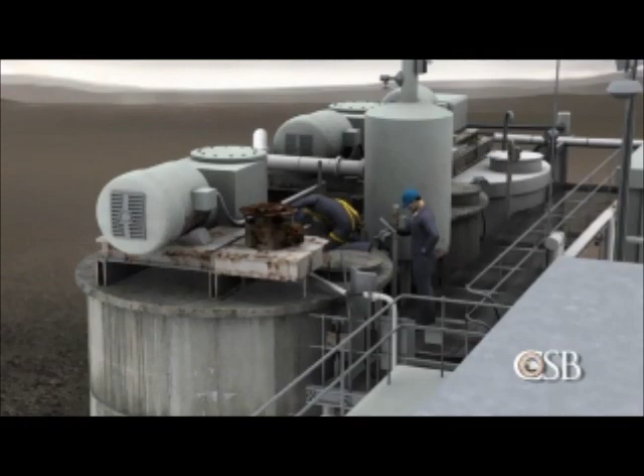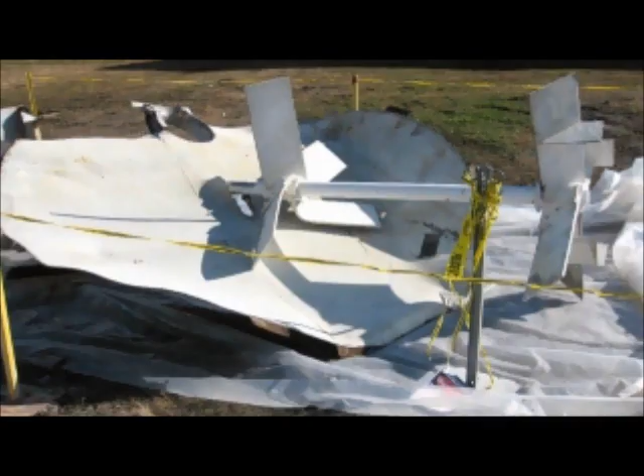On November 9, 2010, a powerful explosion shook the DuPont chemical manufacturing plant in Tonawanda, New York, a suburb of Buffalo. A contract welder was performing maintenance work on a tank that, unknown to him, contained flammable gas. The explosion blew the top off the tank, throwing the welder to the ground and killing him instantly. A second contract worker was burned.

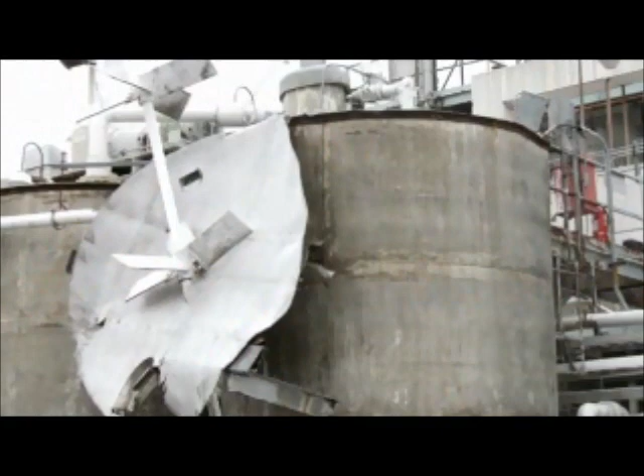The tragic explosion at the DuPont facility exposed weaknesses in how process hazards were analyzed and controlled. The result was the death of a welder in a preventable hot work accident. Hot work accidents occur when workers are welding, cutting, or grinding near flammable vapor, and were the focus of a 2010 CSB safety bulletin. Deficiencies in the safety management of hot work were among the causes of the tragedy at DuPont.

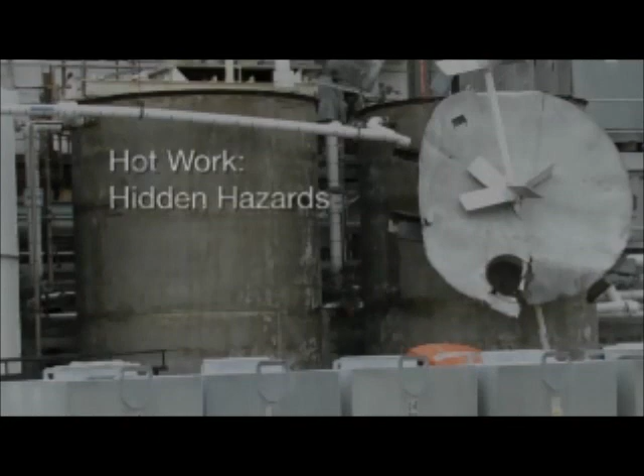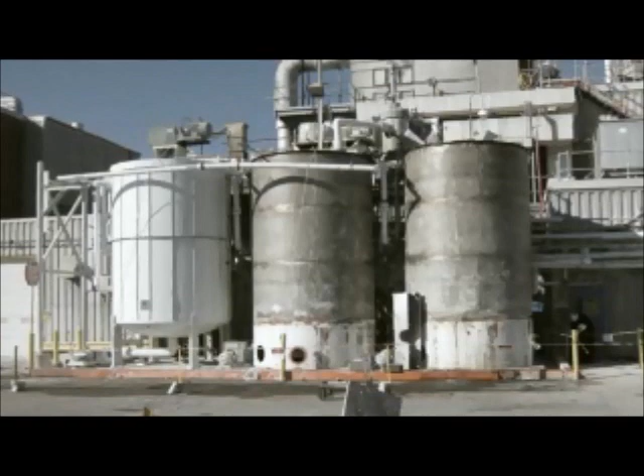DuPont's Tonawanda facility manufactures a polymer known as Tedlar, used in solar panels, and Corian for use in countertops. The process of producing Tedlar began with a chemical reaction to convert flammable vinyl fluoride gas into a slurry of polyvinyl fluoride polymer, or PVF, in water. The PVF slurry then passed through separators.

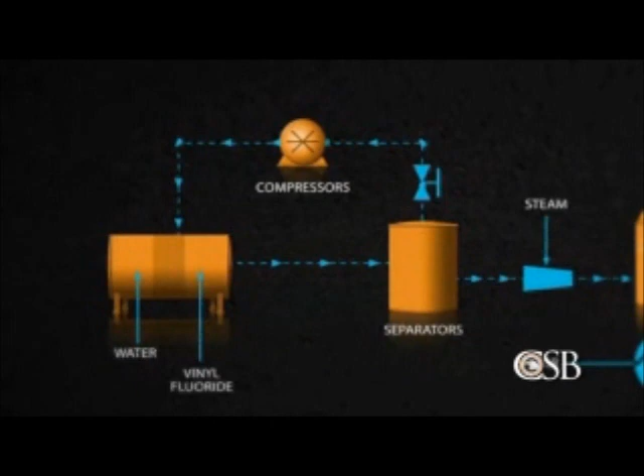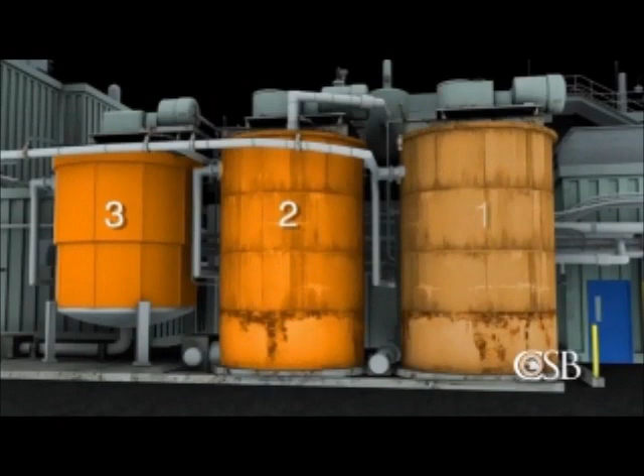Compressors recycled unreacted vinyl fluoride gas into the process, while a small flash tank released residual vinyl fluoride into the atmosphere. Finally, the slurry was transferred to one of 3 insulated holding tanks, usually tank number 3. Tanks 1 and 2 were reserved for slurry overflow. Tank 1 normally remained empty.

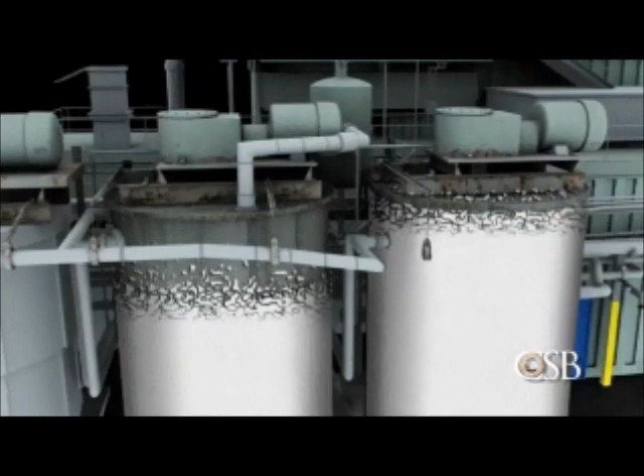On October 22, 2010, the Tedlar process underwent a planned shutdown, during which workers removed the asbestos insulation on tanks 1 and 2. Removing the insulation revealed that the agitator supports for the tanks were heavily corroded. DuPont directed contractors to repair the supports, which would involve welding and grinding on tanks 1 and 2.

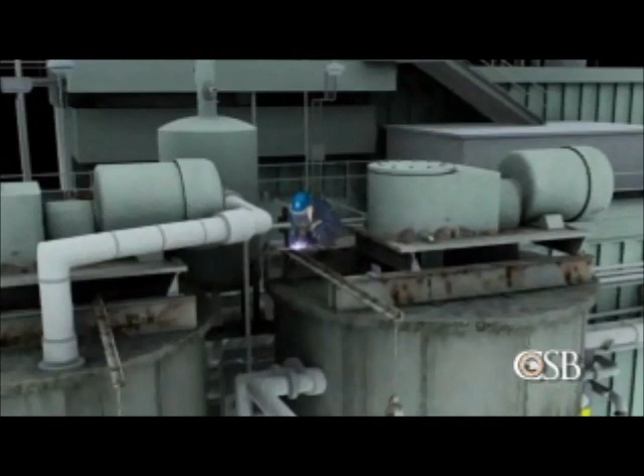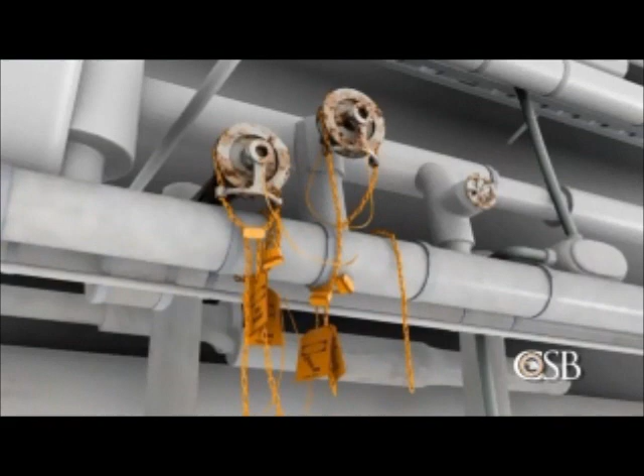The hot work on tank 2 occurred during the shutdown without incident, but the repairs on tank 1 were delayed while parts were ordered. DuPont personnel determined that it would be safe to perform hot work on tank 1 after the restart. On November 6th, DuPont operators locked all 5 valves leading to and from tank 1 in the closed position in order to stop potential slurry flow. The tank's agitator motor was also locked out.

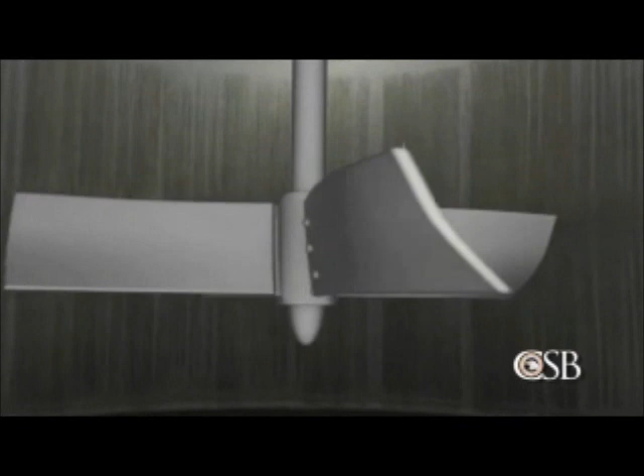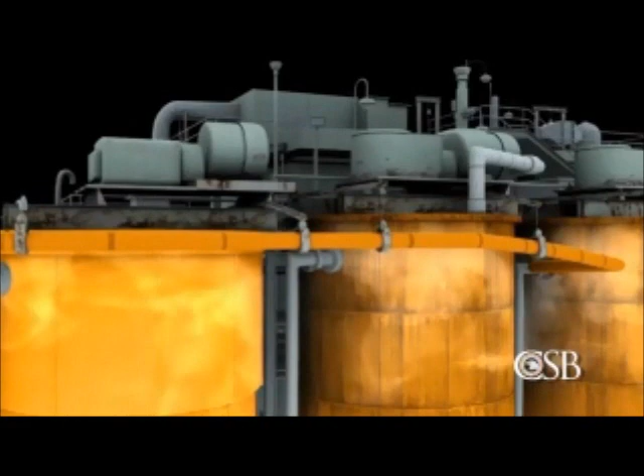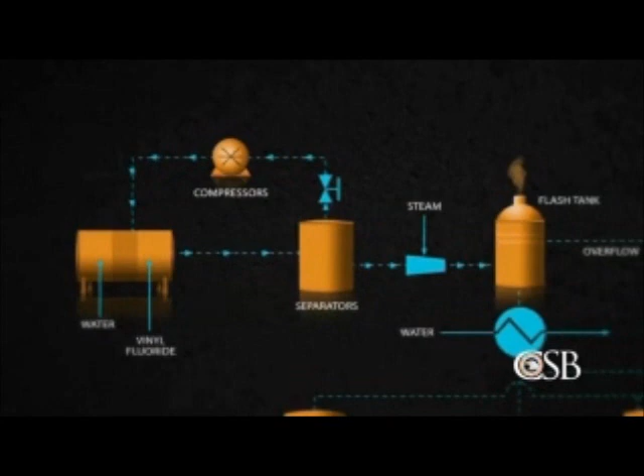However, DuPont personnel did not block the flow of gas inside the overhead piping, or overflow line, that connected the vapor space of all 3 tanks. They mistakenly believed that flammable vinyl fluoride gas could not reach any of the slurry tanks. But the CSB investigation found that even in normal operations, vinyl fluoride was not completely removed from the slurry and was always present in the slurry tanks in varying amounts. When the process restarted on November 7th, the flammable gas was able to travel from tanks 2 and 3 through the open overflow line into tank 1.

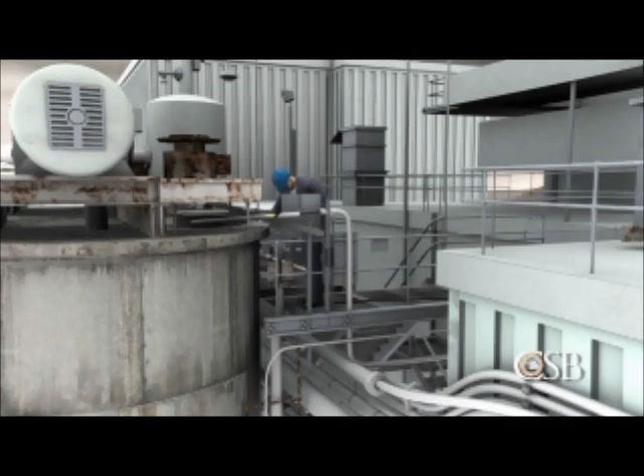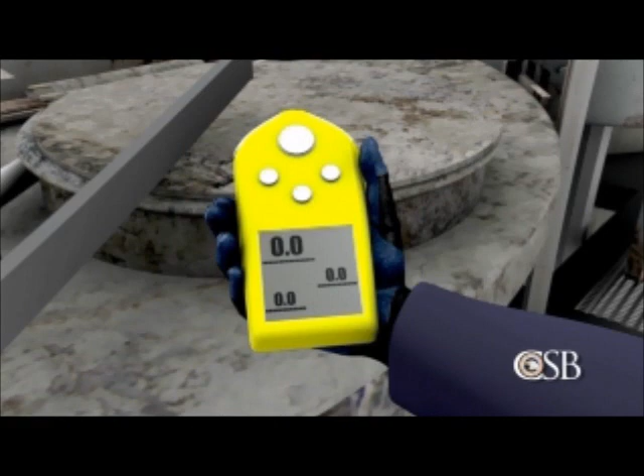On the morning of November 9th, a DuPont technician tested the atmosphere above tank 1, where welding would later take place. There were also 2 continuous air monitors in the vicinity. No flammable gas was detected, and the hot work was cleared to begin. But no testing was done to measure or monitor the atmosphere inside the tanks, where, unknown to the contractors, the flammable gas was at dangerous levels.

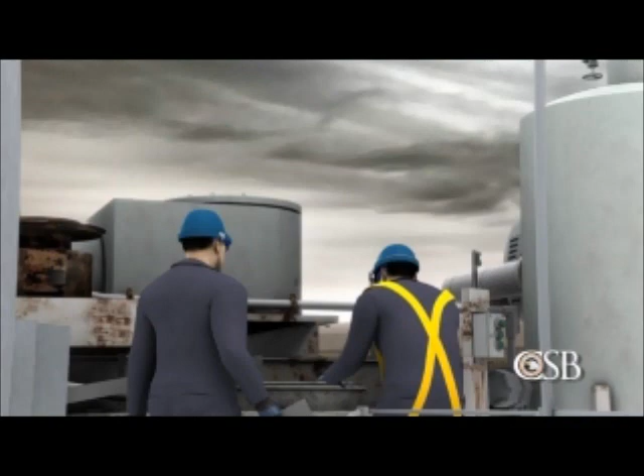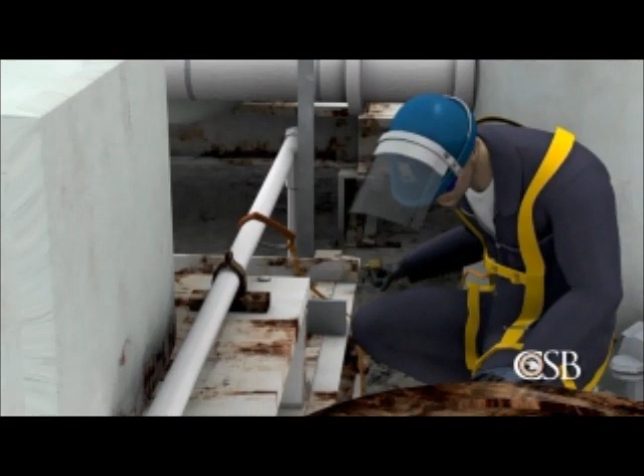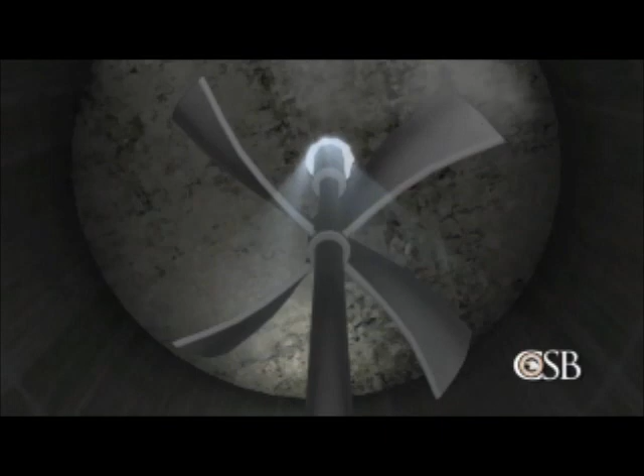Around 9 a.m., 2 contract workers began welding and grinding on tank 1. The welder connected his safety harness to the tank's agitator support and worked on top of the tank as the foreman looked on from the nearby catwalk. At approximately 11 a.m., the welder was repairing corroded portions of the agitator support beams directly above the flammable gas. A hole around the agitator shaft may have provided a pathway for ignition. Welding sparks could fall into the tank, even as flammable gas might drift upward toward the sparks. The ignition of the vinyl fluoride caused a powerful explosion.

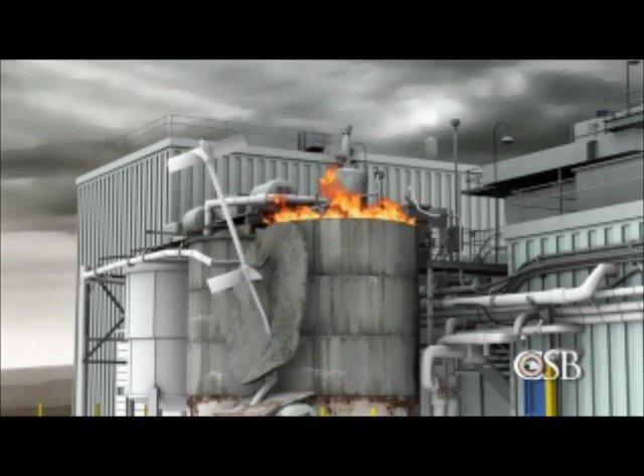The force of the blast blew the top of the tank almost completely off. A flash fire erupted that consumed the flammable gas and quickly burned out. The welder was thrown to the ground, killed instantly from blunt force trauma. The foreman's face and arms were burned.

Mark Wingard was a member of the CSB team that investigated the accident at DuPont. Had DuPont technicians tested Tank 1 for a flammable atmosphere, they would have known that any hot work presented a serious explosion hazard. But plant engineers did not realize that significant amounts of flammable gas could be present in the slurry tanks, and the testing was never done.

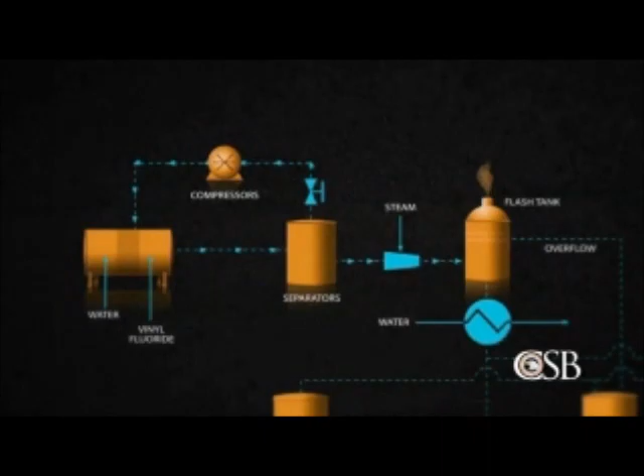DuPont regarded most of the Tedlar production process as covered under the OSHA standard for Process Safety Management, or PSM, and therefore subject to stricter operating and maintenance requirements. But DuPont personnel did not include the slurry tanks in the facility's PSM program. In a 2009 process hazard analysis, DuPont erroneously concluded that flammable vinyl fluoride gas could never reach the tanks in dangerous quantities.

We found that the contractors did obtain hot work permits for welding on Tank 1, but those permits were authorized by DuPont employees who were unfamiliar with the specific hazards of the process, and the permits did not require testing the atmosphere inside the tanks. Two additional factors may have contributed to the tragedy.

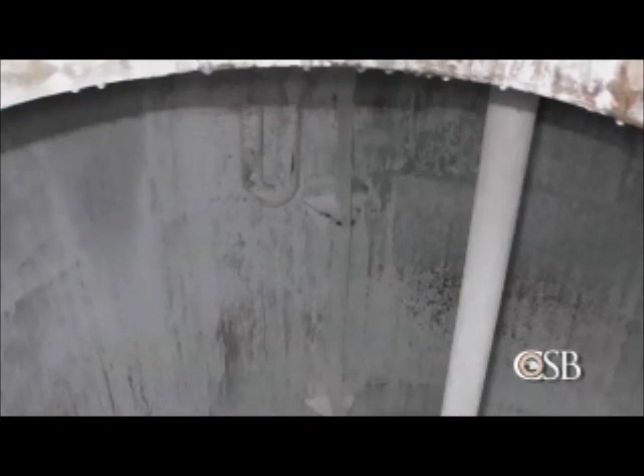Prior to the explosion, DuPont personnel had discovered that slurry tank number 2 had a hole in a liquid trap, which was designed to prevent the flow of gas from the flash tank. Without a liquid seal in the trap, there was an additional pathway for vinyl fluoride gas to flow into the tanks. However, this hazard went unrecognized, and DuPont engineers concluded that it would be safe to return the tank to service. No formal management of change review was conducted.

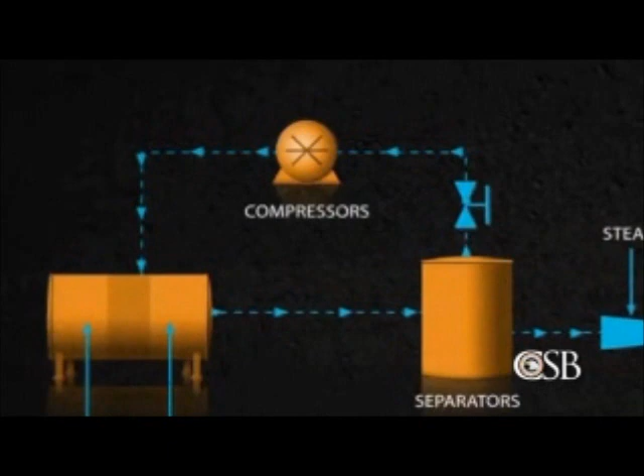Further adding to the danger, on November 8th, there was a malfunction in a compressor used to strip vinyl fluoride gas from the PVF slurry. As a result, the slurry contained more than the normal amount of vinyl fluoride. Once again, DuPont personnel did not formally analyze the safety impact of continuing to operate with a malfunctioning compressor.

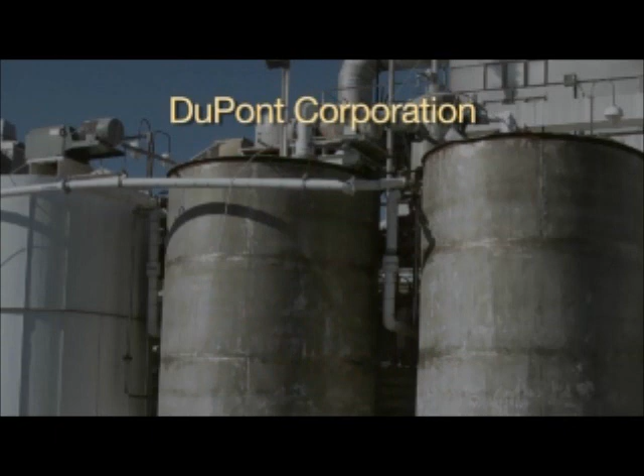In its final report, the CSB recommended that DuPont revise its corporate policies to require atmospheric monitoring inside tanks before and during any hot work. And the board recommended that DuPont require all process piping, including vent lines on tanks, to be positively isolated before authorizing any hot work.

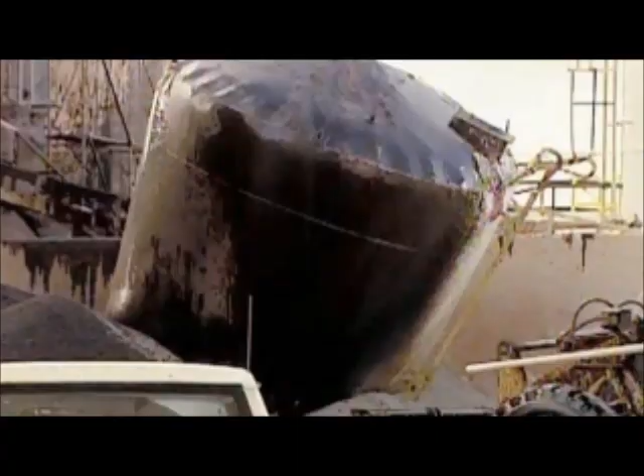In our 2010 Hot Work Bulletin, the CSB identified 11 accidents similar to the one at DuPont. All involved hot work on tanks that ignited flammable gas inside. In all cases, the CSB found that there was not an adequate system in place for monitoring the atmosphere for flammable vapor where hot work was to occur.